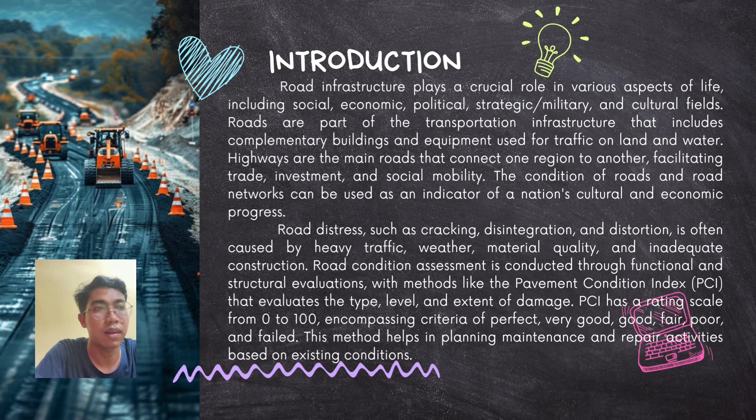Road distress such as cracking, disintegration, and distortion is caused by heavy traffic, weather, material quality, and inadequate construction. Road condition assessment is conducted through functional and structural evaluation with methods like the pavement condition index that evaluates the type, level, and extent of damage. PCI has a rating scale from 0 to 100, encompassing criteria of perfect, very good, good, fair, poor, and failed. This method helps in planning maintenance and repair activities based on existing conditions.

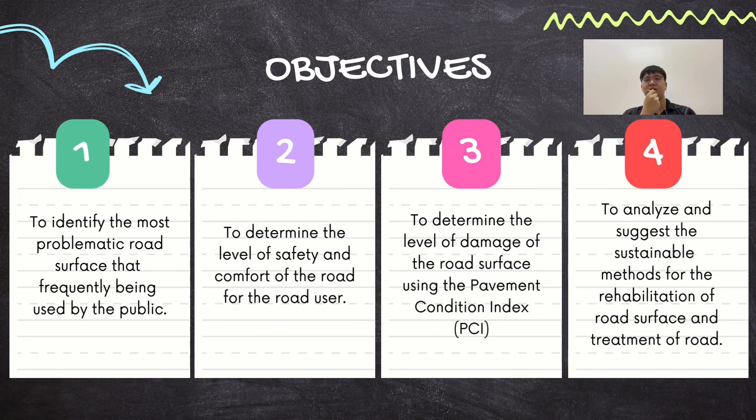So in the part of objectives, we have 4 objectives. The first one is to identify the most problematic road surface that is frequently being used by the public. The second is to determine the level of safety and comfort of the road for the road user. The third is to determine the level of damage of the road surface using the pavement condition index, PCI. And the last one is to analyze and suggest a sustainable method for the rehabilitation of the road surface and treatment of the road.

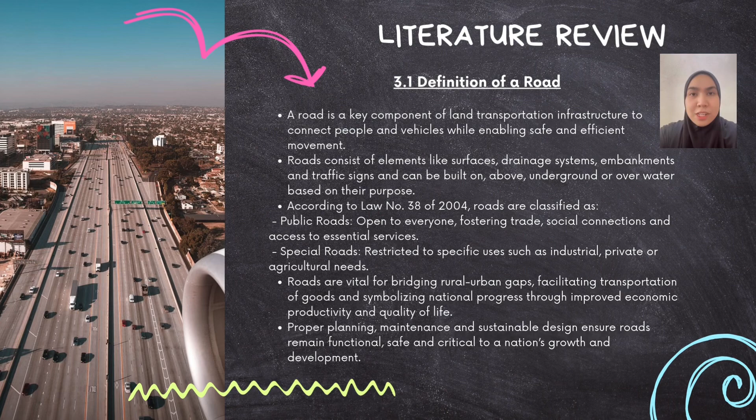According to Law Number 38 of 2004, roads are classified into 2 types, which are public roads and special roads. Public roads are roads that are open for everyone, fostering trade, social connections, and access to essential services. Meanwhile, special roads are restricted to specific uses, such as industrial, private, or agricultural needs. Roads are important for bridging rural and urban gaps, facilitating goods and symbolizing national progress through improved economic productivity and quality of life. Proper planning, maintenance, and sustainable design ensure roads remain functional, safe, and important for a nation's growth and development.

The next one is assessing road conditions. Evaluating road conditions is crucial to keep the road safe, functional, and durable. This is done through methods like inspection, the Pavement Condition Index (PCI) and the International Roughness Index (IRI). Visual inspections are straightforward and help spot obvious issues like potholes and cracks, while PCI provides a reliable 0 to 100 rating system in order to prioritize maintenance efficiently. Meanwhile, the IRI focuses on road smoothness, which directly affects driving comfort, vehicle wear, and fuel economy.

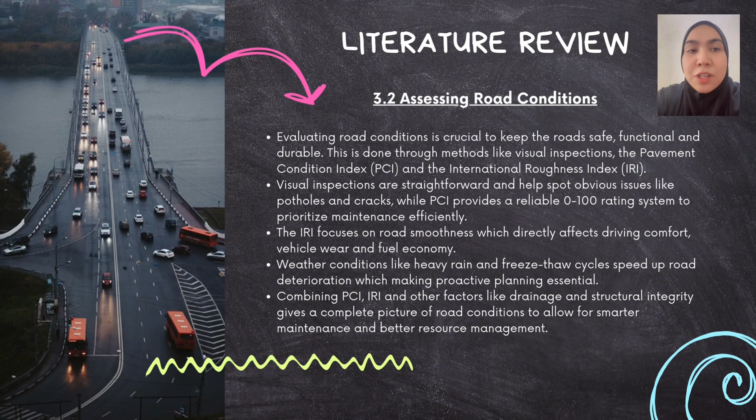Weather conditions like heavy rain, freeze-thaw, flood, and so on speed up road deterioration, which then makes proactive planning essential. And combining PCI, IRI, and other factors like drainage systems and structural integrity gives a complete picture of road conditions that will allow for smarter maintenance and better resource management.

Next one is the Pavement Condition Index (PCI). PCI is a reliable tool used to assess how much a road's pavement has deteriorated. This is to help engineers and planners decide on maintenance and repair needs. It works by visually inspecting the roads for issues like cracks, potholes, and rutting, and then assigning a score from 0, which indicates worst condition, to 100, which indicates excellent condition. PCI is simple, affordable, and effective in prioritizing repairs in order to ensure maintenance funds are spent wisely.

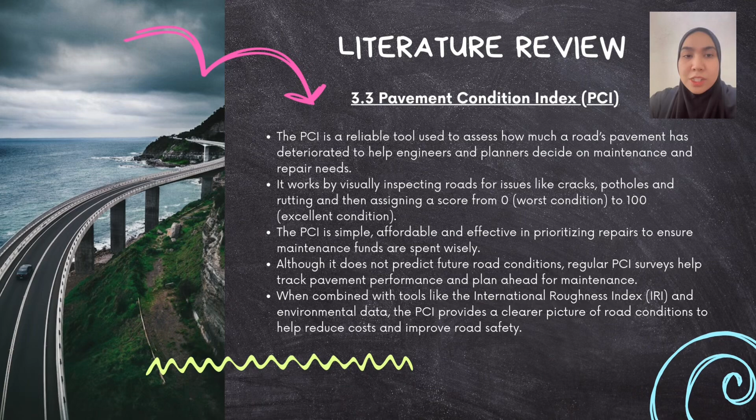Although it does not predict future conditions, regular PCI surveys help track pavement performance and plan ahead for maintenance. When all of these tools are combined, which means PCI and IRI and other environmental data, it will provide a clearer picture of road conditions in order to help reduce costs and improve road safety.

The methodology of the project to achieve the project objective involved a variety of strategies and procedures to gather essential data on the road condition. Initially, we conducted direct observation and noted vehicle types and usage frequency at the UTHM campus in Batu Pahat, Johor. We utilized the pavement condition index method to evaluate the pavement condition.

The PCI analysis involved dividing a 1 km section into 100 meter segments. The selected sections underwent detailed analysis to ensure significance. This approach allowed us to determine whether the road requires repair or maintenance.

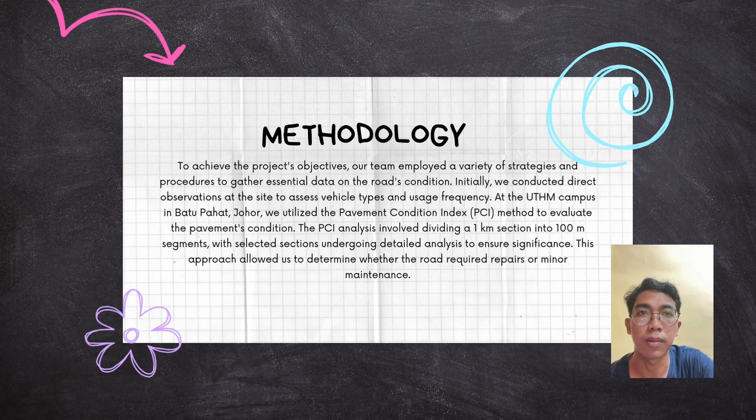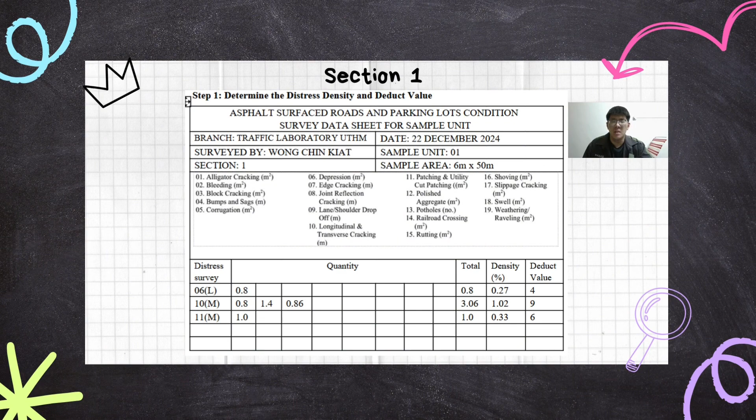Then we have to determine the maximum corrected deduct value, where the number of deduct values greater than 2 is Q equal to 3. The total deduct value is equal to 19. Then we use this information to find the CDV from figure B45. Then reduce the smallest individual deduct value to 2 and finally determine the maximum CDV, which is equal to 13.

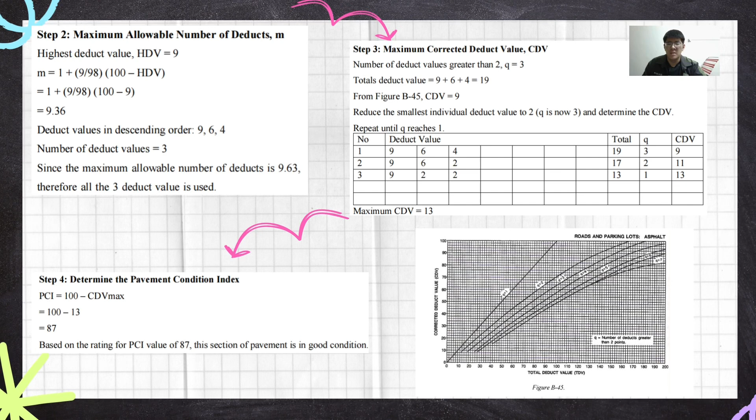Finally, in step 4, PCI is calculated as 100 minus the maximum CDV, which is 13, and we get the PCI for section 1 equal to 87. Based on the rating for a PCI value of 87, this section of pavement is in good condition. The steps are repeated for each section until section 7.

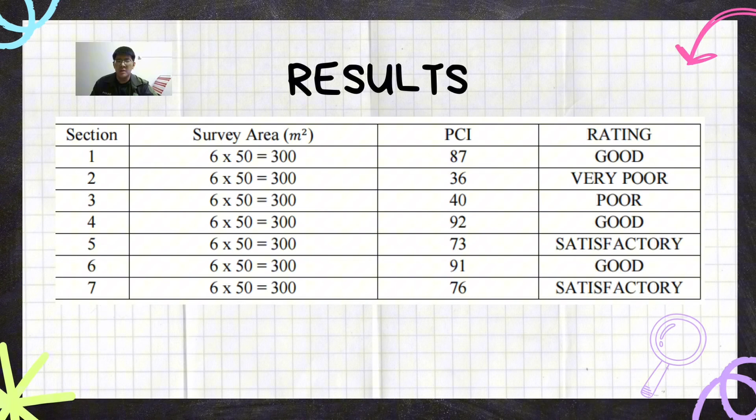The table shows the result of the PCI rating in each section. We can see that sections 1, 4 and 6 are in good condition. Sections 5 and 7 are in satisfactory condition. But sections 2 and 3 are in bad condition, where the ratings are poor and very poor.

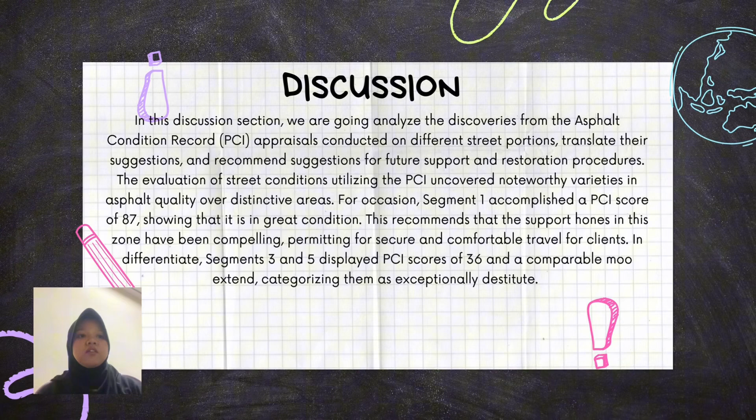In this discussion section, we are going to analyze the findings from the pavement condition records and appraisals conducted on different street portions, interpret them, and give suggestions for future maintenance procedures. For instance, segment 1 achieved a PCI score of 87, showing that it is in great condition, while in contrast segments 3 and 5 display PCI scores of 36 and comparably low, categorizing them as poor.

The research team divided the 1 km street into 100 meter segments and collected data for various pavement distresses such as alligator cracking, bleeding, block cracking, bumps, corrugation, depression, edge cracking, joint reflection cracking, etc. These scores highlight deterioration trends and user safety. This difference underscores the significance of regular assessment and timely intervention. The findings align with past studies, demonstrating that missing street maintenance can lead to increased repair costs and safety risks over time.

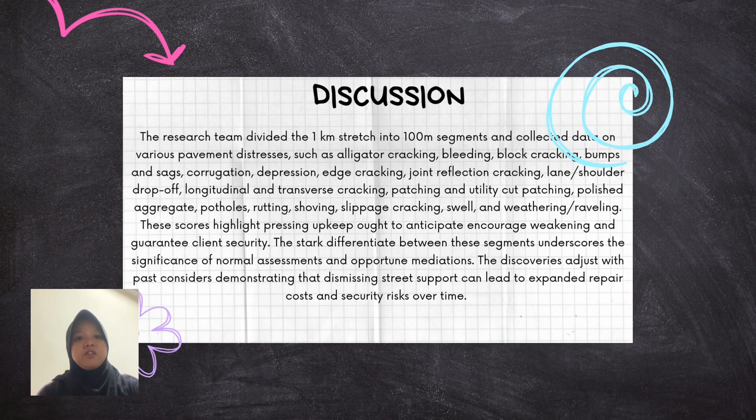Last but not least, in the conclusion, the observations show that many vehicles and people use the road at UTHM because it is the main road. This is due to the heavy traffic, especially buses, which frequently pass through the road and increase the load on the road surface, causing the soil beneath the road to compact. The survey results indicated varying road conditions.

Section 1 was in good condition, section 2 was very poor, section 3 was poor, section 4 was good, section 5 was satisfactory, section 6 was good, and the last section 7 is in satisfactory condition. The PCI values range from 36 to 92, indicating conditions from very poor to good. To address these issues, 2 alternatives can be used, which are chip seal coating and HMA treatment on the road network with very poor conditions.